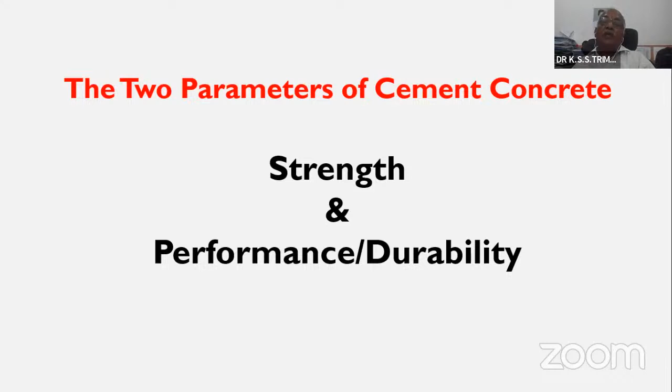So we are discussing more on performance and durability. Now, performance and durability — I consider them the same thing, synonymously. Performance and durability are due to external loads, but in this talk we discuss microstructure and constituent materials, because external loads is a very huge topic — live loads, dead loads, snow loads, wind loads, moisture, sea water, and so many things. So there's external loads, and there's microstructure and constituent materials. These microstructure and constituent materials play an important role in the durability of the concrete, strength and concrete durability.

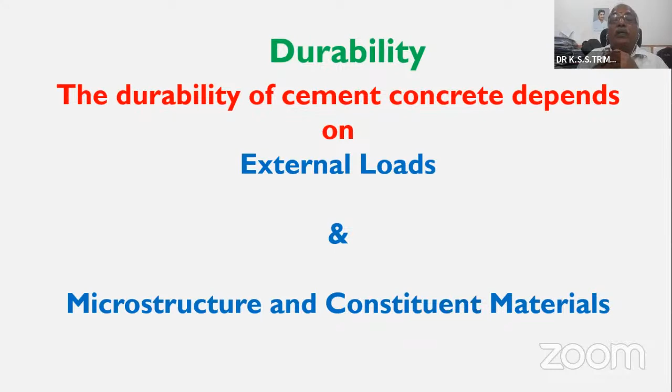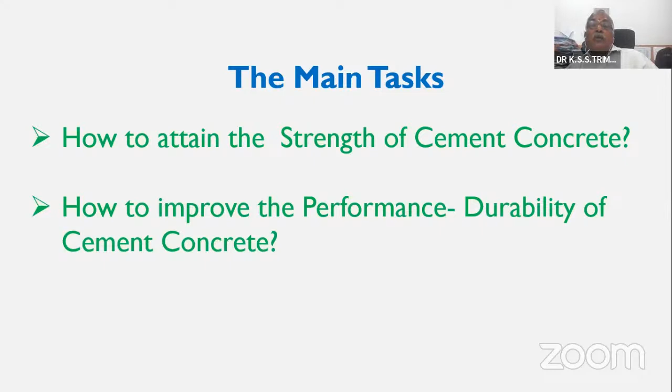So our main tasks are two things: how to get the strength of the cement concrete — we are already very good at it. Now our task is how to improve the performance durability of the cement concrete. So our present discussion is mainly depending on performance and durability of cement concrete.

We all know very well now that cement concrete strength depends upon design properties, standard execution procedures, coarse aggregate, fine aggregate, and use of admixtures, plasticizers, pin vibrators, construction practices, etc. We don't discuss the strength of concrete in this session. We discuss more on durability and how to attain it.

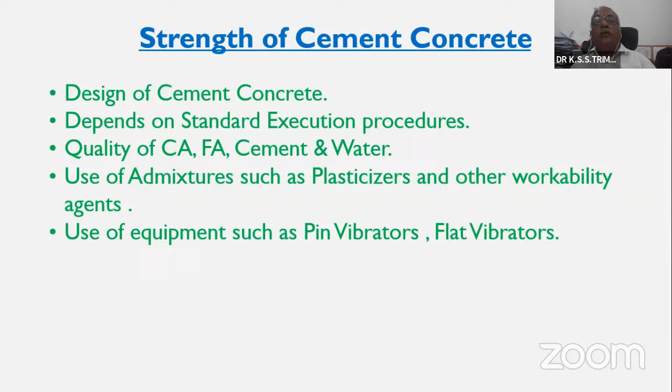So what is durability? I have shown one picture about the failure of durability. Durability is sustained withstanding of all conditions, all loadings, all weather conditions, and performing well and sustaining. That is in a nutshell about durability.

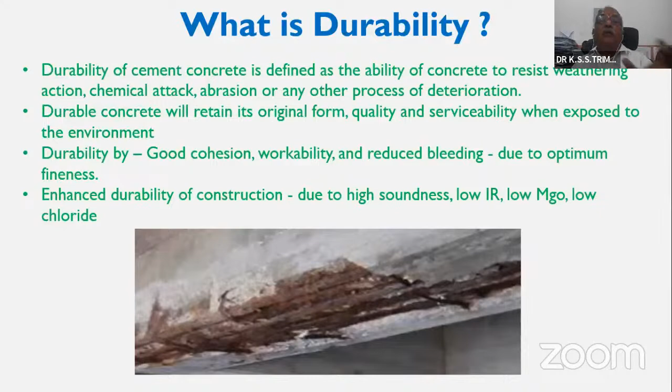Next, I'll concentrate more on the other slides where I am more interested in the images and practical photos. Here, what is IS 456 2000 saying more about it.

Our IS 456, and even its next coming version, is concentrating more on performance and durability of cement concrete, because the need of the hour is that our structures have to stand for 100 or 120 years, but some structures are not that durable. So IS 456 2000 and its revisions are concentrating more on the performance and durability properties, and the conditions and procedures for how we have to implement regarding the durability of concrete.

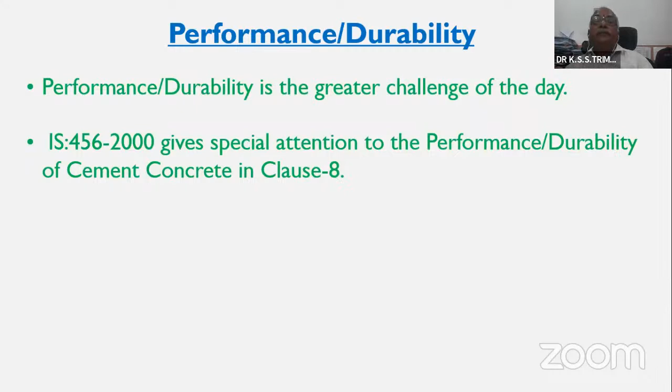So IS 456 is concentrating more on the microstructure and physical properties of concrete, such as low permeability, low free water, and the environment—ingress of acids, sulfates, carbon dioxide, carbon monoxide, oxygen, and other dangerous and deleterious materials.

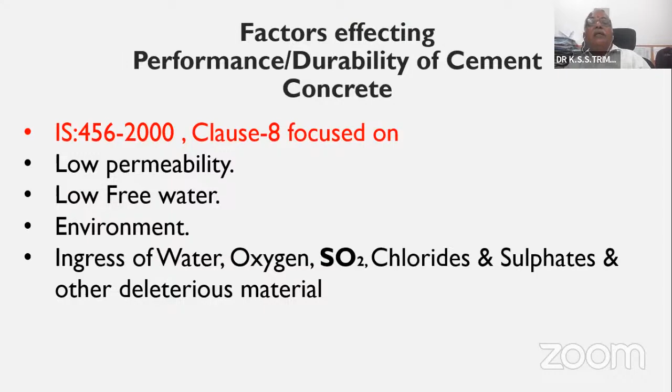So IS 456 is concentrating on which built-in protection factors we have to focus on, how to make concrete more durable, what activities we have to incorporate in executing concrete structures for durability, and how to codify the durability requirements.

All over the world, durability of a structure means once our structure is durable for 30, 60, or 90 years, then the investment you are making for 90 years is very good. If it fails within 30 years, your investment is gone, and it is a national loss, a loss to the entire country.

So durability of structures, in other terms, is nothing but investment in terms of hundreds of thousands and crores of rupees, lakhs of crores of rupees. Durability means you are creating an asset for another 30 or 20 years. That is my contention, the contention of the industry, the contention of IS 456, and the contention of industry experts. So why I am emphasizing this—making a structure more durable means you are creating an asset for another 20 or 30 years.

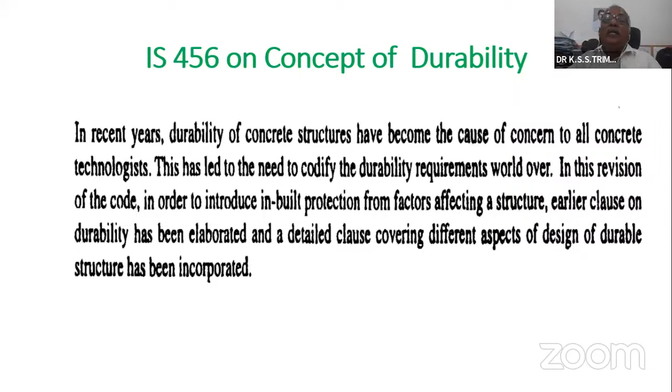So IS 456, once again in detail, is concentrating on the ingress of water, ingress of chemical solids and liquids, ingress of hydrochloric acids, oxygen, carbon dioxide, chloride, and sulphate. All these things will attack the structure, and when they attack the structure, it will not be durable for more than the design period.

So the structure is designed for maybe 30, 90, 100, or 20 years. If the structure fails due to all these things in 30 years, you have to invest double the amount. So one structure of 10 crores durable for only 20 or 30 years means next you have to invest at least 20 or 30 crores for that building.

So in other terms, by avoiding all these sulfate attacks, acid attacks, or chloride attacks and making it more durable, you are again contributing to the wealth of the country.

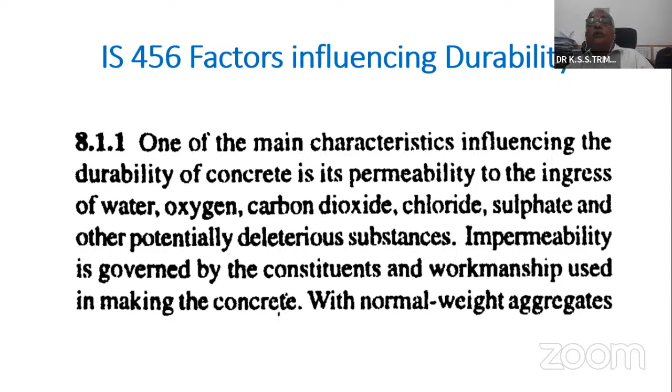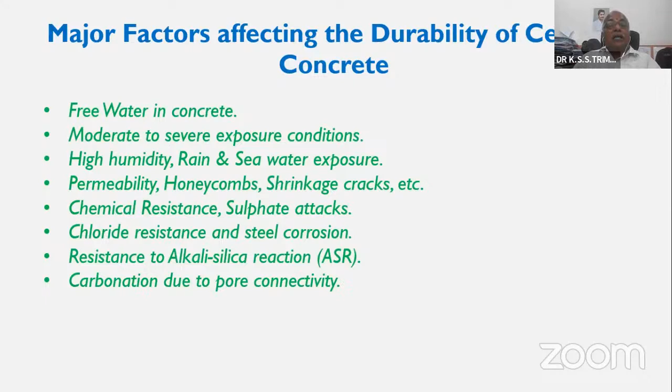Next, these are the main factors—generally academic things. I don't concentrate more on academic things because we are all faculty members with very good knowledge about it: free water in concrete, exposure conditions, humidity, permeability or porosity, chemical resistance, chloride resistance, resistance to alkali reaction, and carbonation due to pore connectivity. These are academic things.

I'm not focusing on that. My main focus is how to reduce the permeability. Once you reduce the permeability, reduce the pore volume, reduce the pore connectivity or interconnectivity of pores, you make the concrete impermeable. These things will increase the life of the structure.

So my focus—I request our faculty members to note—there are so many procedures for reducing the permeability of concrete, reducing the pore volume, reducing the pore connectivity. There are many conventional methods, chemical methods, or admixtures: mechanical admixtures, chemical admixtures, and mineral admixtures.

So many things are there. Let us try to find out if any other procedures are there to improve the permeability, decrease the pore volume, reduce the permeability, reduce the pore connectivity, and make the concrete impermeable. Let us think on these points.

Once you decrease all these things, the migration of salts and other dangerous chemicals will be avoided and reduced. In my experience, for the last 32 years, when concrete is permeable, with more pores and more interconnectivity of pores, there are more seepage connections in the concrete, which makes it chemically very dangerous in terms of durability. So concrete must be finally physically and chemically more durable.

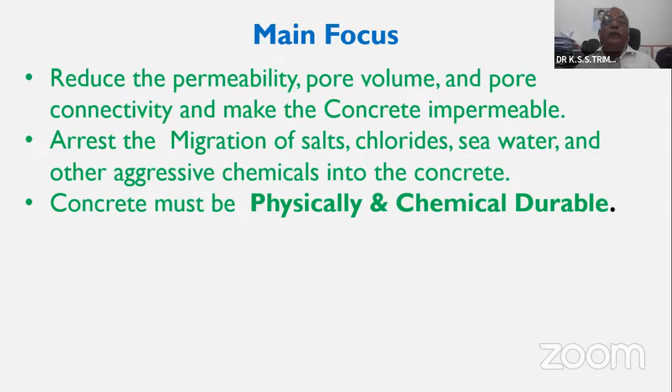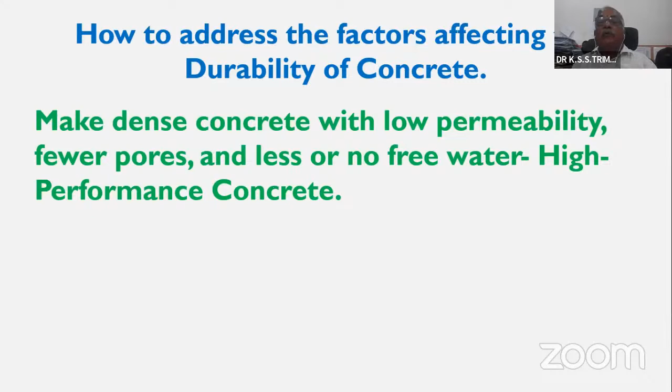How to address the factors affecting the durability of concrete? Once again, some words may be repetitive because in the flow of explanation, some words may look repetitive, but in the interest of the subject and topic, they are very important. So low permeability, fewer pores, less or no free water, and the quality is high performance concrete — that is what is more durable.

It may be saline water, there may be saline humidity, more humidity — so many things here. When you see the bigger picture, so many conditions affect the durability of the structure, you can assess it. What are there in the books? The factors affecting durability. Beyond that, as research persons, academicians, or industry people, we have to think, and our vision shall be beyond the points written here.

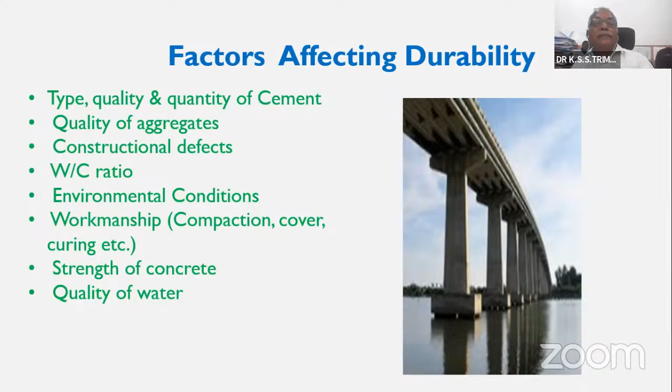Next, once again, mechanically I am defining it: low permeability, high workability, high strength, high modulus of elasticity, high density, high dimensional stability — high performance concretes which are more durable. So low permeability means less prone to chemical attack, hence more durable.

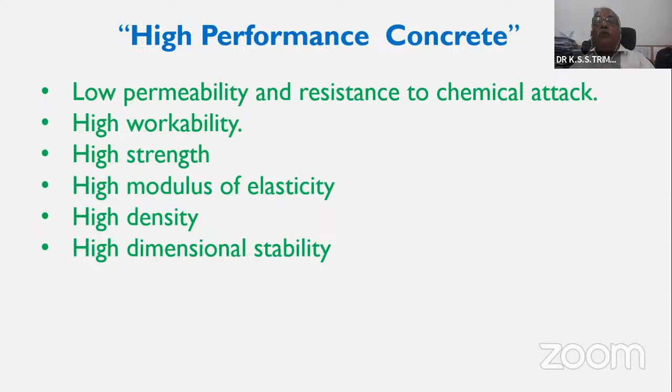This is academic: ingredients of cement concrete — we all know cement, water, coarse aggregate, fine aggregate, and admixtures.

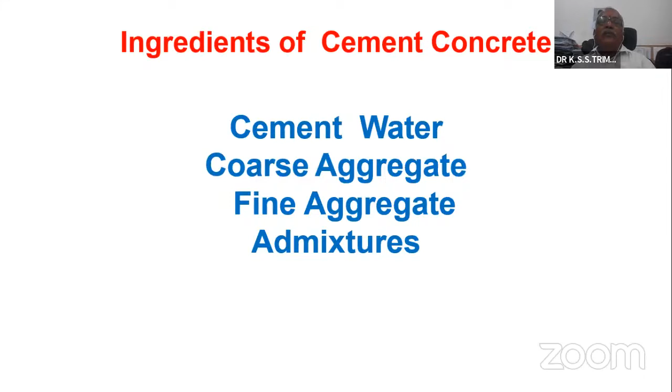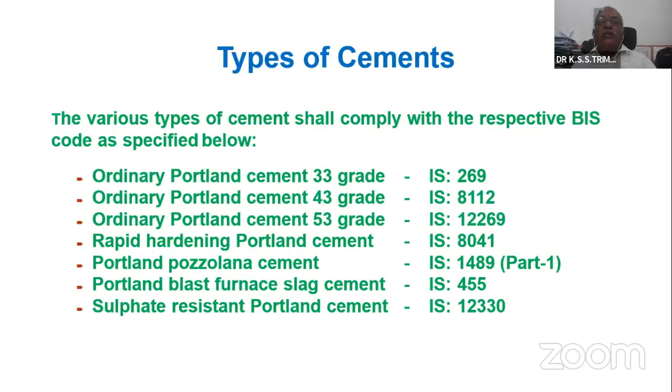Next, types of cement. This is academic — we know OPC cements, 43 and 33 grades of concrete. Nowadays, our multi-storied buildings are designed using these.

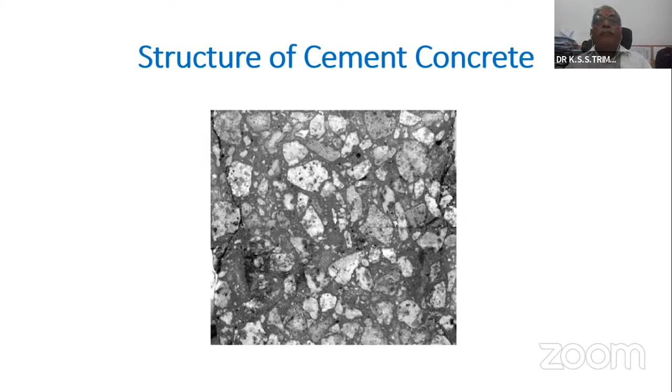One minute — here you can see the microstructure. The aggregates you can see, the cement paste also you can see here, and similarly the voids also you can see here. I am more concentrated on the microstructure of the concrete in the backdrop of how to improve the durability of the concrete. Again, I emphasize the microstructure and the load transfer mechanism, and how we can improve it more efficiently.

What is the load transfer mechanism? Is it from coarse aggregate to fine aggregate, coarse aggregate to cement paste, or cement paste to cement paste? What is the transition zone? How does it affect the coarse aggregate or cement paste? How does it affect the load transfer mechanism? How does it improve the durability of the concrete?

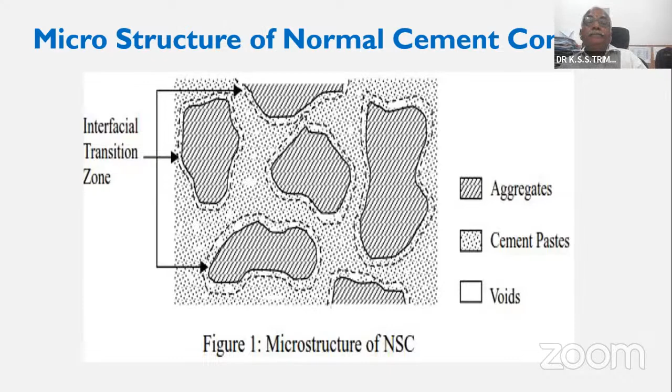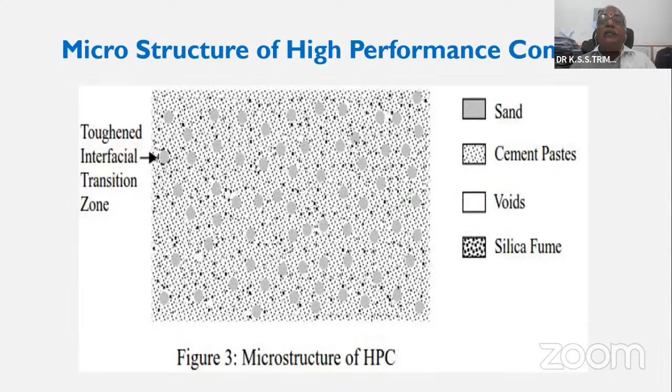In conventional concrete, some of the gaps are not filled, not packed completely. Once again, I emphasize the microstructure of the concrete in the load transfer mechanism, which drives better durability of cement concretes.

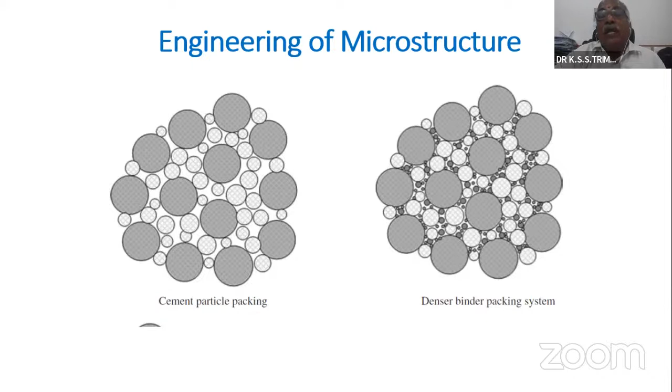So we have to engineer the microstructure and fill up all the voids to make a denser binding material. The cement paste shall not be a simple cement paste; it shall be denser with no voids or less voids, making it a better packed, engineered microstructure of concrete, so that it improves the durability and extends the life of the cement concrete structure.

Once again, academically I am not that much interested in definitions and other typed material, which I have seen for the last 30 or 35 years in the industry, where concretes are failing, where durability is decreasing, and where we as field engineers or industry people are not efficient enough in improving durability. I am more interested in these things, so I am concentrating more on images, diagrams, and sketches.

Beyond that, excess water makes the cement paste or cement concrete more porous and more permeable, with more pore volume. So what I am trying to convey is how to execute cement concrete structures with an optimum water cement ratio of 0.25 or 0.30, and how to avoid excess water cement ratio, how to reduce unrequired water.

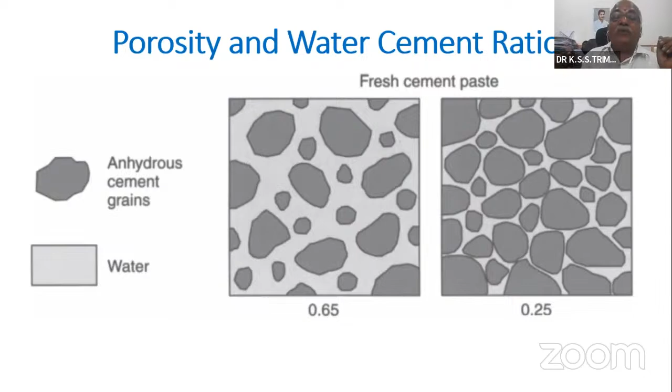Here you can see another problem. Here I am more concentrated on the images, pictures, problems, and site conditions. Ultimately, the need of the academicians, the need of the industry people is how to handle the problems faced in the industry, in the field, in execution.

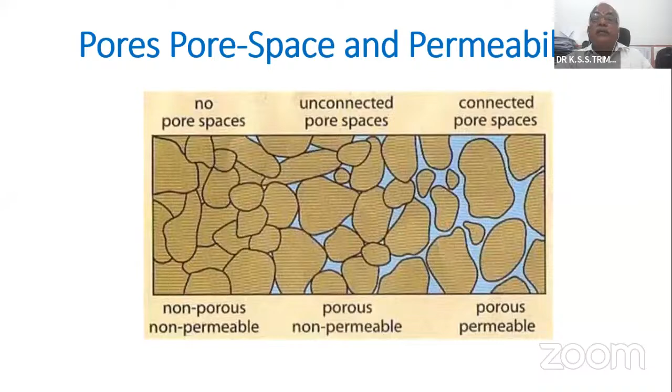Similarly, here you can see the capillary pores connected with high permeability. The need of the hour: most of India has so many thousands of kilometers of coastal area, and there are so many places in Kerala, Karnataka, UP, or somewhere where the rainfall is more than 100 centimeters per year. So regularly the concrete structures, the buildings are exposed to the rainwater. This rainwater, how does it affect the

cement concrete structures where the pores are interconnected. Capillary, here you can see the pores are interconnected, and there is every possibility of saline water attack or rainwater attack, which has more oxygen, or similarly chloride attacks, or sulfate acid attacks, or acid vapors, or saline water, or so many things. Once the capillary pores are connected, once there is high permeability in the structure, there is every possibility the structure in due course of time will fail and become less durable, and fail structurally.

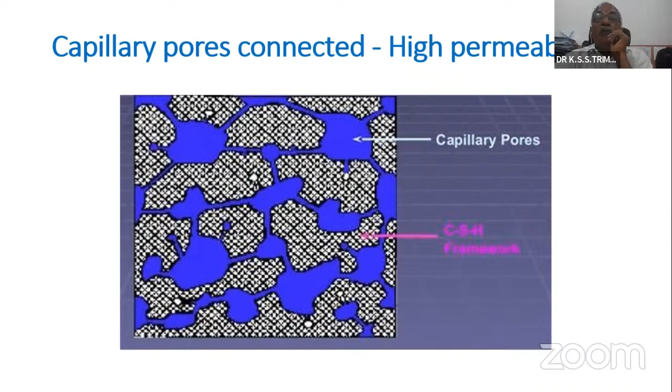Even though the building may not collapse because of the design load, there are so many safety factors. But I personally see some buildings where the beams are cracking, the slabs are cracking, there is interconnectivity of pores. You can visualize it, you can see it where the water is leaking, where the seepage is there, where the lime is leaking, where the porosity is there. Everything you can see once the capillary pores are connected, high permeability is there. This makes the structure less durable, and it will be very dangerous to the structure.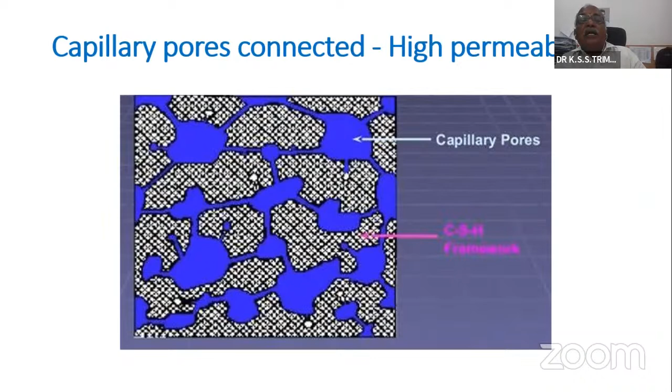So one of the examples here I am showing: the pores are connected, the surface water is reaching the reinforcement. Once the surface water with the dissolved oxygen and dissolved gases is reaching the reinforcement, it means the structure is gone. The rusting has started. The cancer has started.

Cancer of the reinforcement has started. There is no procedure in the world to reverse the rusting of the reinforcement. The only method is to avoid the rusting of the reinforcement with better construction procedures. You cannot, once it starts the process of rusting, it means the building is gone. You can temporarily repair it, or to some extent restore it, but you cannot get back the original strength of

the reinforcement, the original structural stability of the structure. So the connectivity of the capillary, and capillary of pores, and rusting of reinforcement is a dangerous problem to the durability of the concrete, to the sustainability of the buildings.

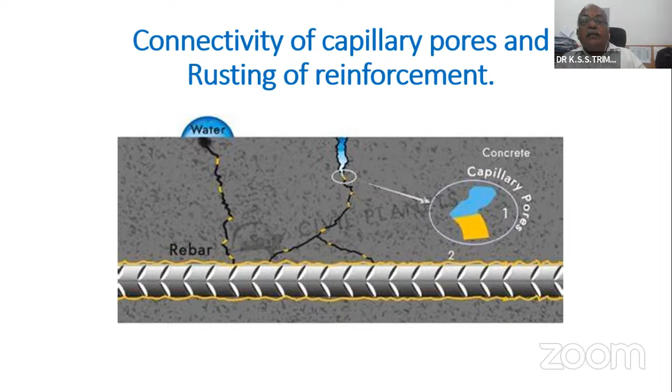So the excess water-cement issue, already we discussed in the earlier slides. Excess water cement ratio will cause, it will occupy more space over time, and it will cause more pore voids and more pore volume, and interconnectivity of the capillary pores, and increase the permeability of the concrete or mortar, and it's very dangerous. Next.

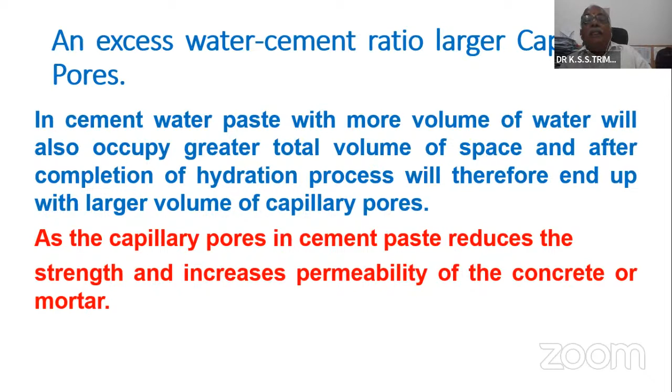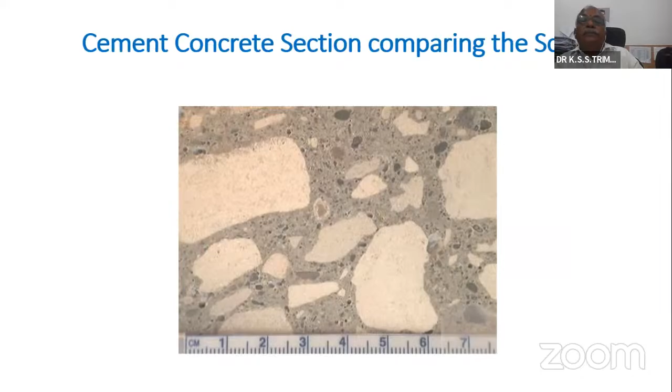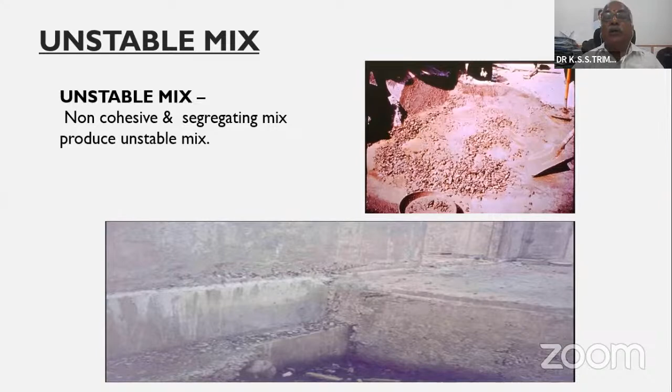This is regarding the practical kind of unstable mix regarding the durability of the concrete. Unstable mix is non-cohesive and segregating. Mortar is deposited in one location, and 20 mm coarse aggregate is deposited in another location of the member, which will cause a very undurable scene and undurable concrete.

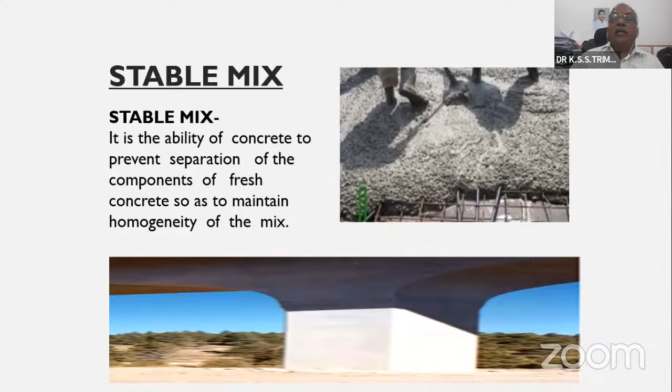Stable mix is a routine practical exercise with better design and better mixers, better coarse aggregate, fine aggregate, cement, design mix, and better construction procedures.

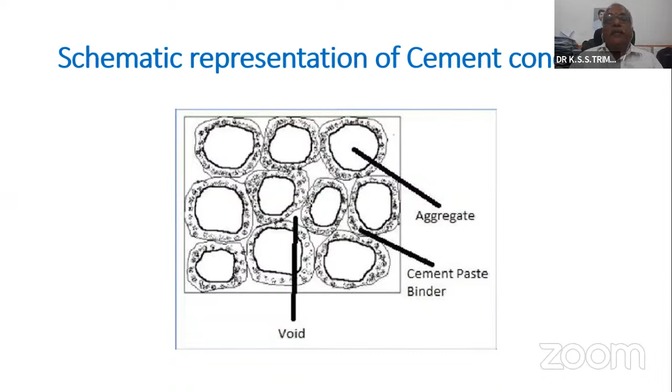Schematic. So here I am trying once again to show the aggregates, cement paste, binder, and the voids. This is just a cross section showing the coarse aggregate and fine aggregate matrix.

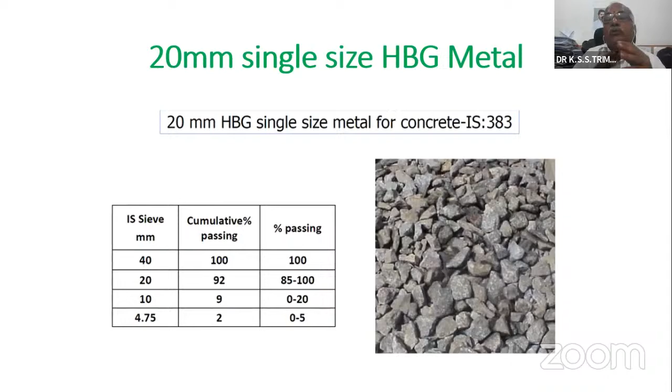We all know about the 20 mm HBG size metal. It is a single size metal which you use for concrete. Here I am trying to impress upon you that in single size metal, there will be more pore space in between the coarse aggregate material. With 20 mm coarse aggregate single size metal, there will be more voids, and the packing will not be that close.

In the next slide we will see graded metal. So, single size metal versus graded metal - in the graded metal, the voids are more packed. So the load transfer mechanism will be more efficient if you properly design the concrete member with a graded metal with proper ratio. It will increase the durability of the concrete.

The option I suggest is graded metal, properly graded, properly sieved, with fineness modulus correctly obtained, and designing a proper mix with HBG graded metal of 20 mm or 12.5 mm sizes. It will increase the durability of the concrete. Some other research also has to be done regarding these issues by academicians and researchers.

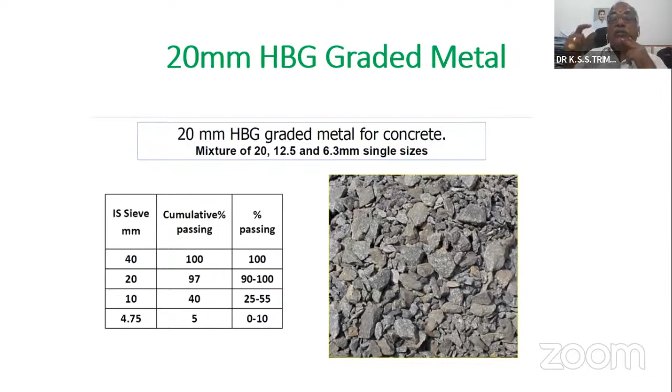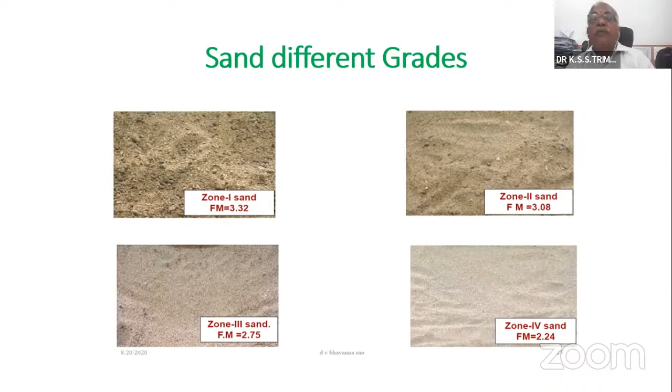These are the different grades of sands we use. Generally we use rough sands of zone 2, zone 1, or zone 3, depending upon the type of construction or mix design and fineness modulus.

Next, characteristics of durability properties of concrete. Here I will emphasize low porosity, low permeability, resistance to chemical attacks, early strength, and continued strength development.

So here I want to draw your attention to continued strength development and how it is attained. Earlier we have seen the leaching of one of our retaining walls with free lime. This free lime is utilized when reactive powder silica is added at 2%, 3%, or 5% as per the design, so that you can have this property of continued strength development.

Early strength of 7 days or 14 days, and continued strength development next at 30 days, 90 days, or 180 days, or 365 days. So what is the role of this continued strength development?

Somebody may ask me a question - strength is already attained, what is the need of it? Yes, there is a need for it, because the free lime which is already there has to be consumed. That's one point. Next, it has to add to the strength and improve the quality. You have to have continuous strength development for a period of time - it will increase the durability.

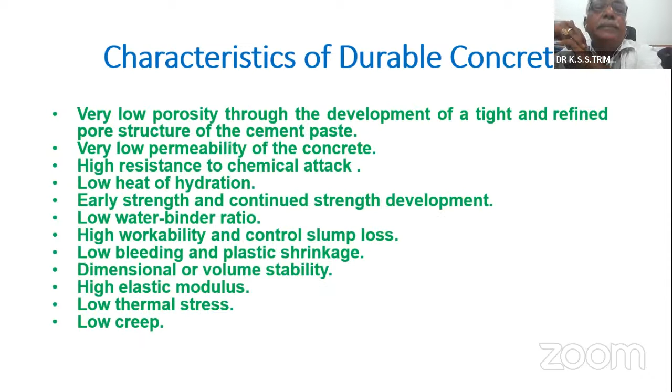So, which are the factors affecting the durability of concrete? The structural design, number one. Study of the environmental conditions, number two.

I am more interested in the microstructure in this discussion now. So in the microstructure of the concrete - water cement ratio, cement content and material quality, mix design, workability, cohesiveness of the concrete mix - all these things will add to the durability characteristics of the microstructure.

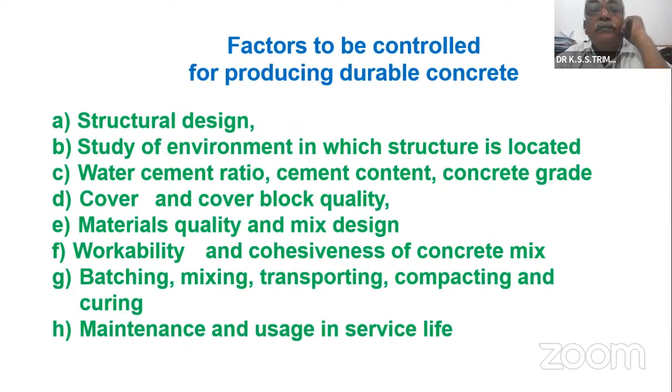So we are discussing how to increase the durability of the cement concrete. What are the methods we adopt, we practice in improving the durability? So we have water, in the cement concrete, aggregates, cement, and in addition to that we have pozzolanic and mineral admixtures - pozzolana or slag or some other admixture, which we call mineral admixtures, and chemical admixtures, chemical additives, which increase the durability of the concrete, which is our main idea to make the concrete more durable.

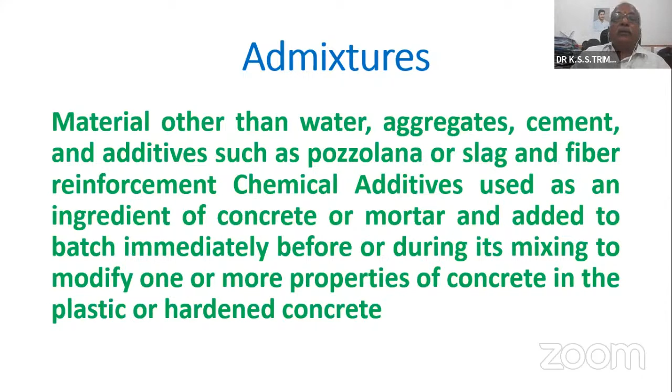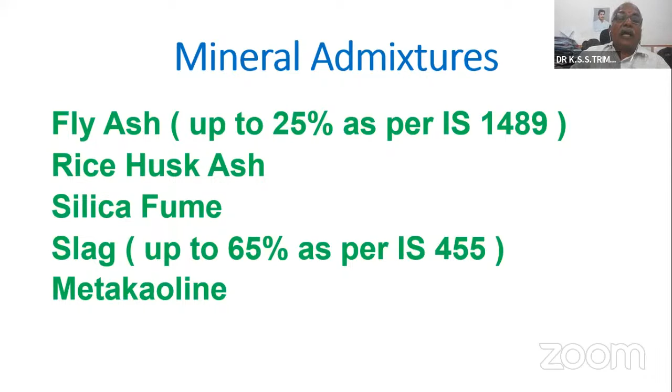Mineral admixtures and chemical admixtures, we are well aware of these. We have good knowledge about it. What are the mineral admixtures? We generally use fly ash, rice husk ash, silica fume, slag, metakaolin.

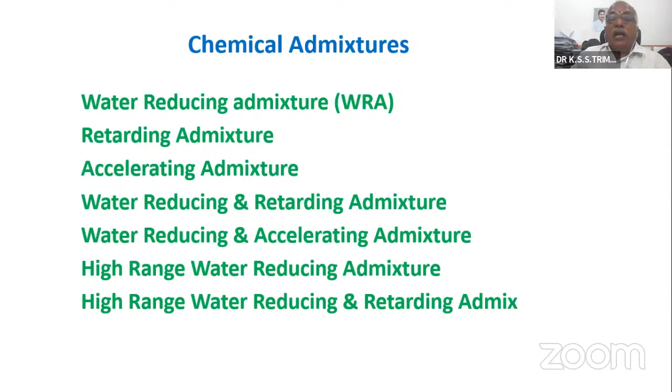Chemical admixtures include water reducing admixtures, retarding admixtures, and accelerating admixtures. We are more concerned about water reducing admixtures, high range water reducing admixtures, and retarding admixtures.

Academically, these are lignosulfonates, melamine sulfonates, naphthalene sulfonates, polyacrylics, and polycarboxylic ethers. There are some other advanced chemical admixtures too, but they are mostly water reducing admixtures.

Once you reduce the water in the cement concrete, we are reducing the pore volume, reducing the permeability, reducing the pore voids. So you are increasing the durability. Ultimately, our point will drive to that point only: how to increase the durability.

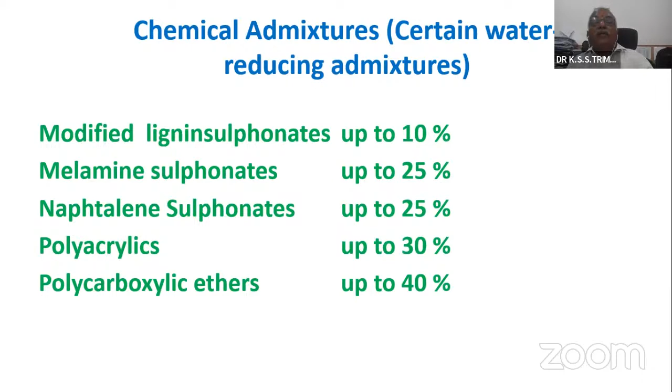Our primary objective is reduction of water cement ratio for a given concrete workability. Workability we have to reach, because without workability we can't place the concrete. Stiff or hard concretes, in the wet stage of production, cannot be placed in the formwork. We cannot cast the beams, slabs, or columns.

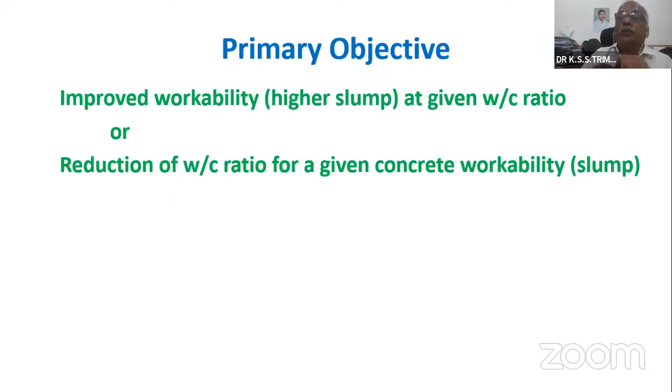So what are these admixtures we use? We are now concentrating on the admixtures to increase the workability and decrease the water cement ratio.

You can see the colloidal particles here. Once the admixtures are added, they are dispersed. The dispersing agent disperses the colloidal particles, which are repelled from one another. So free water, entrapped water, is released, and the concrete is made more workable.

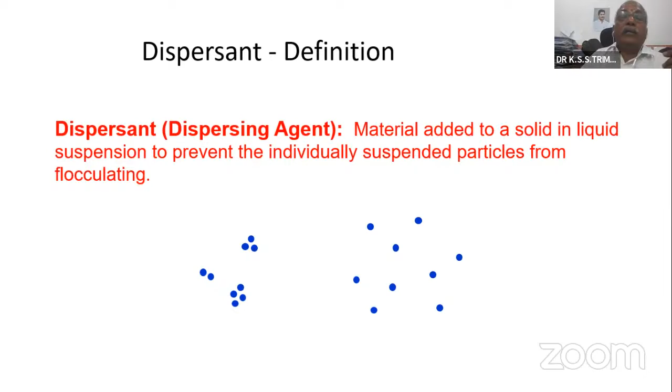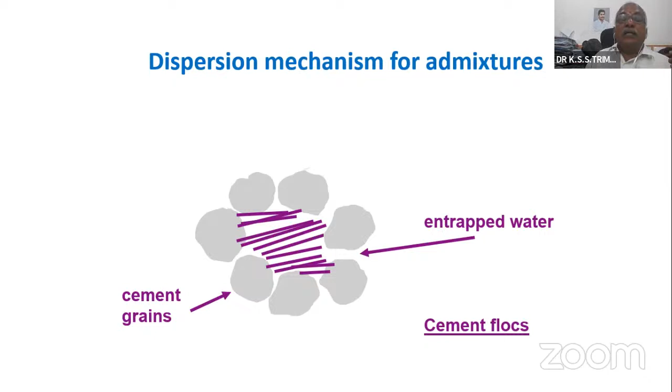That is the entrapped water, the flocculated cement flocs. The trapped water is released and the cement grains are repelled apart so that they become more workable.

So with the given reduced and optimum water, we can increase the workability without adding extra water, by using chemical admixtures, water reducing agents, or super plasticizers.

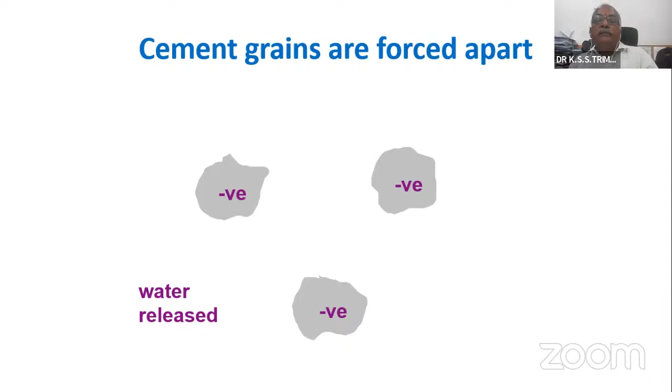This is the academic part of the hydration of cement. We have two parts here: how to release and increase the durable workability of the concrete, making it more durable. We add chemical admixtures and release the entrapped water in the gel, making it more durable and more workable, so that less water is added and more durability is achieved.

Next, we are coming to the mineral admixtures part. What is the role of mineral admixtures in increasing the durability of the concrete? This is an academic thing that we as academicians know well.

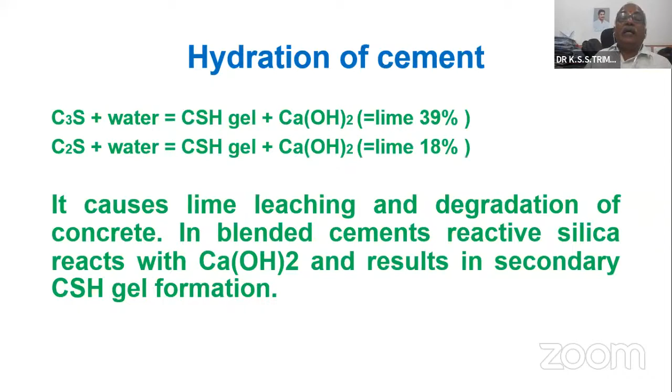So calcium hydroxide is a very dangerous material, we call it free lime. How do we reduce this free lime? Because the leaching of free lime causes the building to become porous, intercapillaries get connected, the reinforcement is rusted, and the structure becomes less durable and will structurally fail.

So you use mineral admixtures, fly ash or silica fume and other pozzolanic mineral admixtures, to overcome the ill effects of calcium hydroxide. Calcium hydroxide, in other terms free lime, is a cancer to the concrete.

Two things are major concerns in cement concrete structures: one is rusting of reinforcement, the reinforcement cancer; next is free lime, the concrete cancer. As researchers, academicians, and industry people, our intention is to avoid both cancers. Reinforcement cancer is rusting, concrete cancer is leaching of free lime.

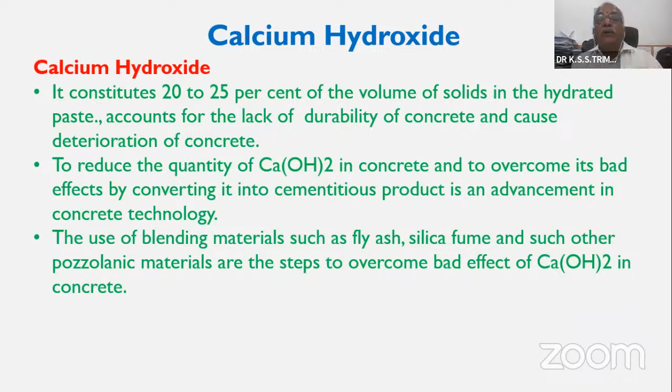So in the hydration process, calcium hydroxide and calcium silicate hydrate form. When we add reactive silica, this calcium hydroxide reacts with the reactive silica, like fly ash or GGBS, in a secondary reaction, consuming the free lime calcium hydroxide, so the concrete cancer is reduced.

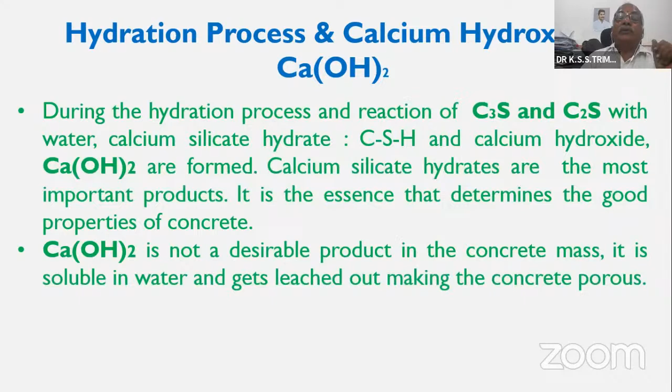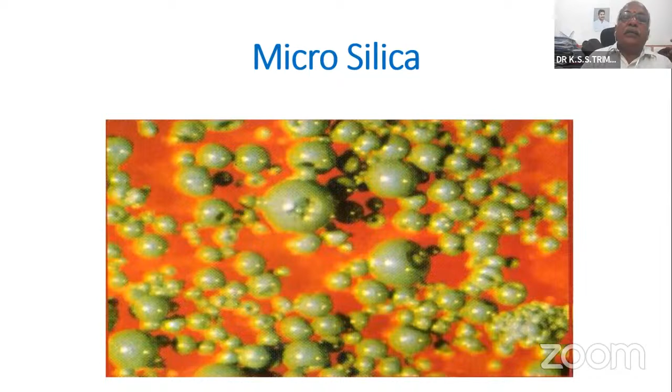Microsilica and free lime: this combination, every time, I am very happy to see this. Microsilica or reactive silica reacts with the extra lime, the free lime, and blocks the fine pores of the concrete.

So you have to understand how this increases the strength of the concrete, how it avoids the pores, how it arrests the capillary connectivity, how it reduces the pore volume. This reactive silica or microsilica reacts with the free lime, blocking, arresting, and filling the maximum voids, if properly designed in the hardened concrete.

So the finest of fine pores of the concrete will be filled and blocked, improving the mechanical strength and bonding strength of the concrete. The combination of free silica and free lime is a very happy and good context for cement concrete people.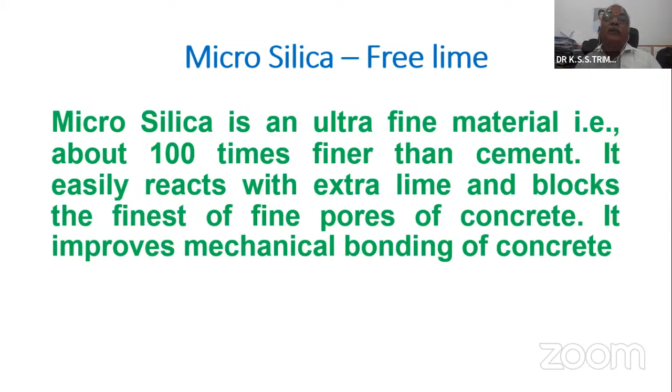So this is the pozzolanic activity. Already we discussed that reactive silica powders, slag silica fume, or GGBS fly ash react with the calcium hydroxide in the presence of water. Again, it will form calcium silicate hydrates. This is the secondary reaction known as pozzolanic activity. These secondary reactions will improve the durability of the concrete.

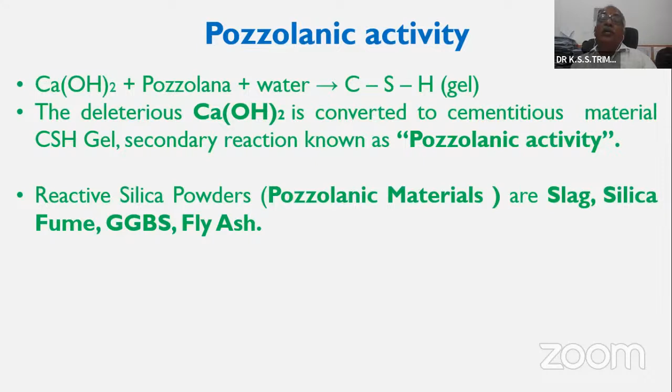Some of our IS 456 or IS codes are defining some industry standards. For Portland slag cement, already industry standards are there, and codal provisions are there. Portland pozzolana cement, PPC, major pozzolanic cements are under the IS code 1489. Similarly, some other codes and articles are being developed for the coming IS 456. In the next release of IS 456, we will have better codal provisions and clauses on the durability of concrete, pozzolanic activity, and reactive powder silicas or microsilicas.

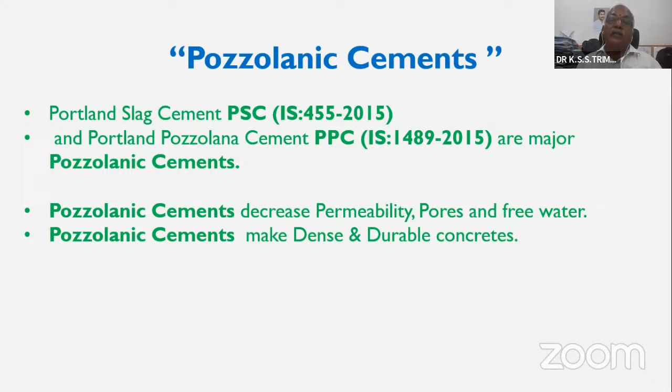So, myths and misconceptions in cement concrete. Whenever I discuss with some people, they say, sir, this cement is very black, so it's very good, it is very hard. Or, sir, this cement is a little bit gray or white in color, it's not good. No - the color of the cement depends upon the raw material used. A dark gray or black cement does not necessarily represent that it's better than cements which are light gray, brownish, or grayish white in color.

So the strength of the cement or cement concrete does not depend on the color of the cement. It depends upon the constituent materials, the raw material from which it is manufactured, how the raw material is designed, how it is pulverized or ground in the ball mill, what is the chemical composition, what is the hydration time, and what are the final particle characteristics. So many things contribute to the strength of the concrete, but not the color.

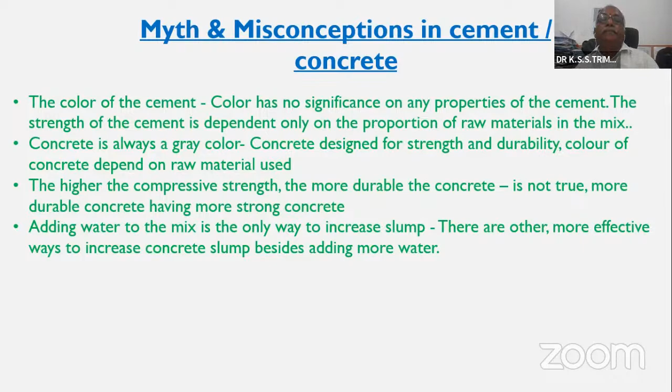Physically, I see over a period of time, when ordinary Portland cement concrete is used, where finer binder material is not there, where the pozzolanic activity is not there, the particles are not closely interconnected in load transfer. So after the top surface is worn out, smaller aggregate particles are dislocated, removed, and pits are formed.